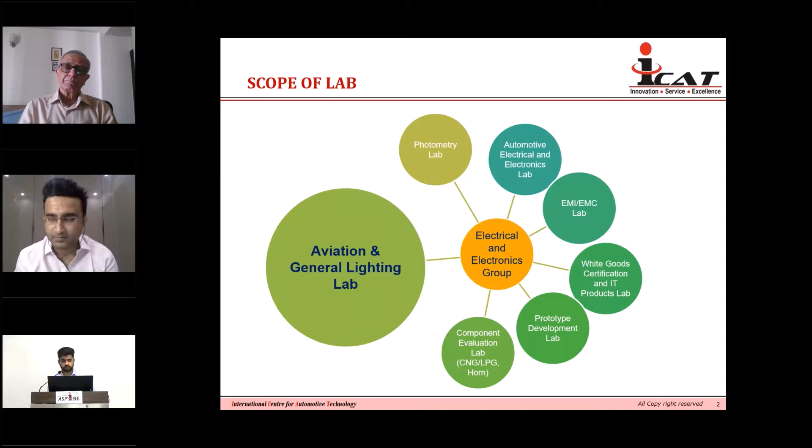In this lab, we have testing capabilities to do tests like dimensional tests for ICAO standard, FAA standard, and BIS standards. Also environmental tests such as high temperature tests, low temperature tests, thermal shock tests, salt fog test, corrosion test, EMI, EMC compliance or electromagnetic compatibility, rain test, moisture test, solar radiation test, dust test which comes under IP test, humidity test, and temperature cycling test.

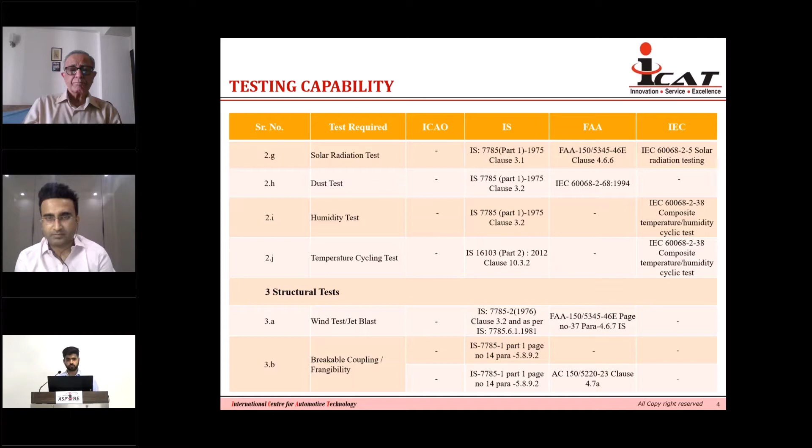Also for structural tests, we can do wind test, jet blast, and breakable coupling.

Under electrical test capabilities, we have insulation resistance test, high voltage test, light fixture power factors, surge protection, light fixture flickers, total harmonic distortion, and dielectric rigidity.

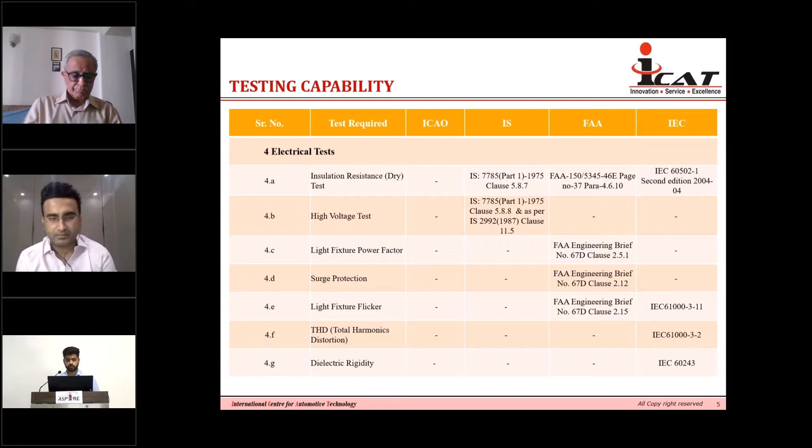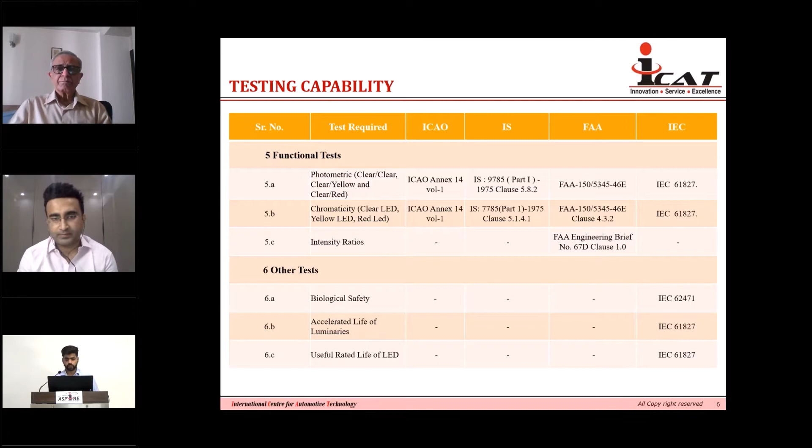Under functional test, we can do the photometric test, the chromaticity test, and the intensity ratios. Other tests can also be done like biological safety as per IEC 62471, accelerated life of luminaries as per IEC 61827, and useful rated life of LEDs as per IEC 61827.

These are the testing facilities which we have in ICAT, like 2-meter integrating sphere for luminaries, 20-inch integrating sphere for LED modules, profile projectors, Type A goniometer, Type C goniometer. We have EMC chambers of 30-meter for vehicle tests, and EMC chambers of 3-meter for component tests.

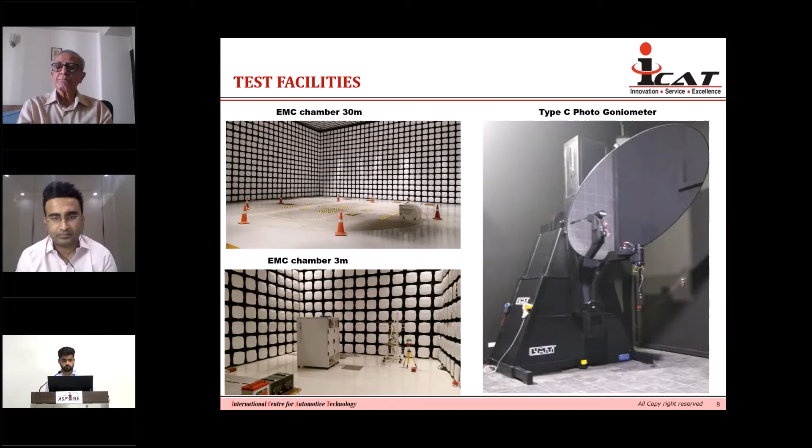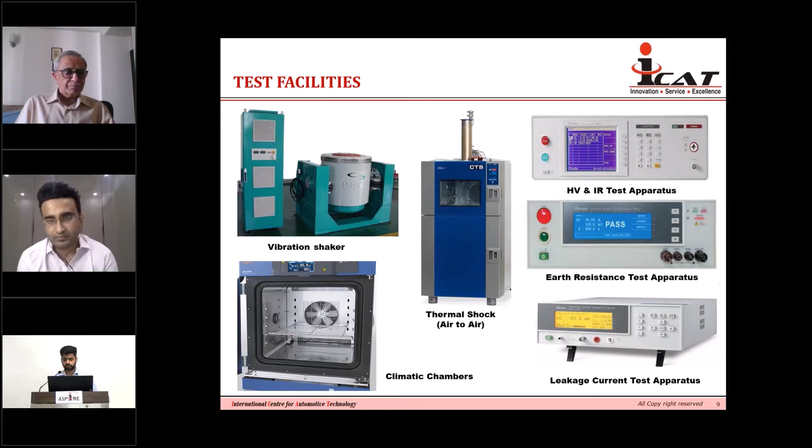We also have vibration shaker, thermal shock test setup, HV and IR test apparatus, earth resistance test apparatus, leakage current test apparatus, climatic chambers. We also have thermal test chambers, endurance chamber, and surge test apparatus.

Apart from this, we have ingress protection against water, ingress protection against dust, the IP test setups. We have a Weather-o-meter, a salt spray chamber as well, and HFT test apparatus for plastic parts too.

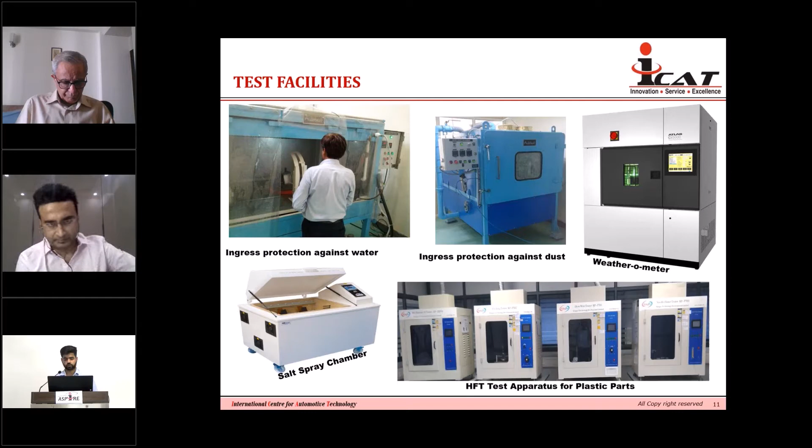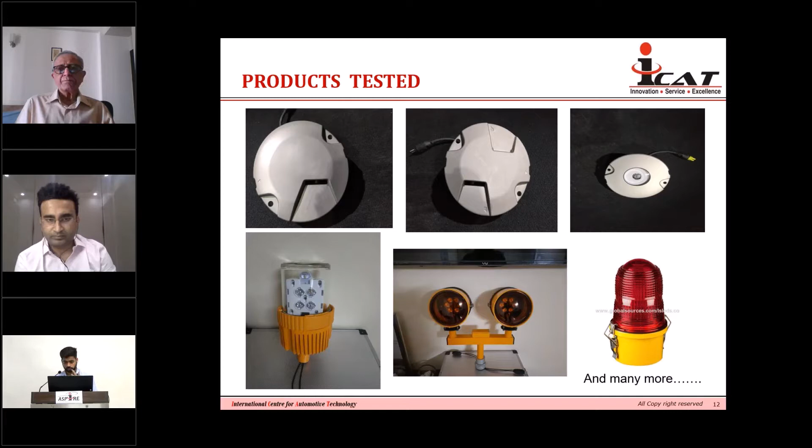These are some aviation products which we have tested at our capabilities or facilities. These are the runway lights which we have done, and we have done more than this also. Thank you.

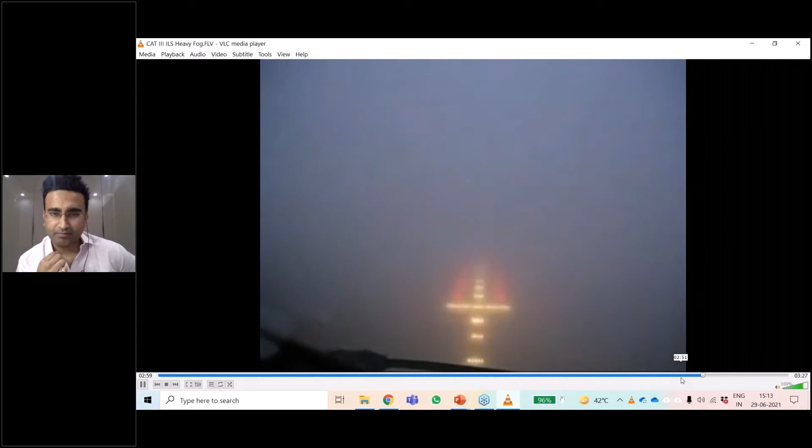So right now he's above the clouds and the fog. Now he has entered inside and he's trying to locate the runway. Then he sees SFL lights, sequence flashing lights. Then he sees the approach lights, then the threshold, the touchdown, the runway centerline, and the runway edge.

So you saw how the runway light fixtures made it possible for the pilot to land in such a low visibility period. So now airports have a duty to give pilots the best visual cues they can at the right moment when the pilot needs them. Because if you don't, they will not be able to land, and there will be runway closure or the flights have to be diverted, which is a very costly affair for the airline as well as the airport operator.

And ICAO study shows that the human eye can only detect a loss in intensity once it is decreased to 30% of its original value, which means every time the aircraft lands, there will be some damages on the light fixtures, on the prism, there will be scratches on the prism, there will be some rubber deposit on the inset lights, and which cannot be detected by human eye. And also, if there's an orientation issue, if the toe angle is not proper, the orientation of the lights is not proper, then also human eye is not able to detect.

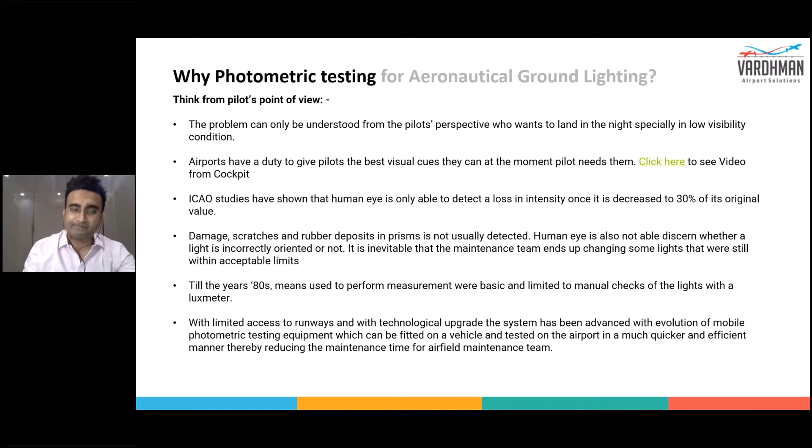So let's talk about this - I have explained everything, but even if sometimes we as humans feel that even if we know everything technically, why implement it? That's where ICAO and FAA play a very important role as regulators, and local DGCA authorities have implemented CAR, which is quite similar to ICAO, to make sure that airports are regulated, and they are ensuring this photometric testing is done as per ICAO.

So let's learn what ICAO says. ICAO in their clause 10.5.1 says that a light shall be deemed to be unserviceable when the main beam average intensity is less than 50% of the value specified in the appropriate figure in Appendix 2. Now, what is Appendix 2? Let's go to Appendix 2. I'm sure some of you must have seen it.

So this is Appendix 2, figure A2-8, which is for runway end light. The left figure that you see talks about the output candela, and the graph shows that every vertical and horizontal degree means 1 degree vertical and 1 degree horizontal, and this average intensity of 2500 candela is calculated based on the crossing points. You measure the output candela at these crossing points, and then you make an average output, and it should be 2500 candela. Not only that, at every point, the output candela should be not less than 1250.

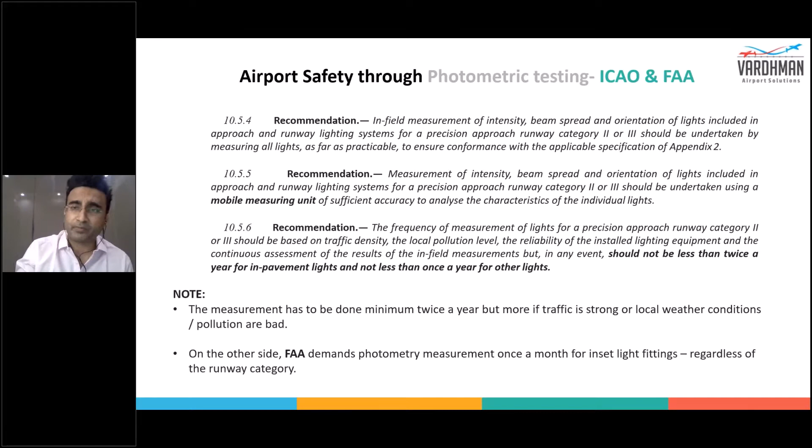And they do it on all airports irrespective of runway category, whether it's simple approach, cat 1, cat 2, or cat 3. They have also kept this threshold level at 70%.

So if the output candela in this graph - as per ICAO, average intensity should not be less than 1,250 - whereas in an FAA compliant airport it should not be less than 1,750, because FAA has defined the threshold level at 70%. So if it's falling below 70%, you need to replace the light.

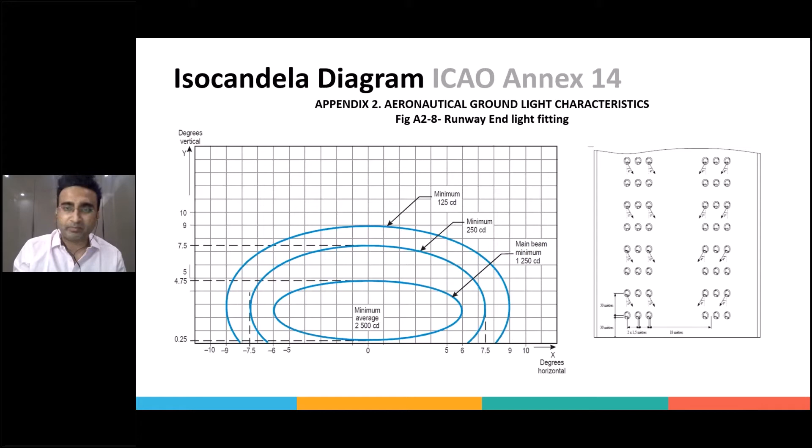So I hope that clears what the regulations talk about. Any questions so far?

Again, I see a blank chat window. So I think maybe a question and answer session at the end would be the way to interact with the audience. I'll continue with the next slide.

So, causes of degradation of the light fixture. Since I can't ask questions right now, I'll go straight to the next slide.

So first, light alignment, and we'll talk about the other parts also, but I'll go one by one so that it is easy for everyone to absorb the information.

Whenever inset lights are installed, this core cutting, the figure third on top shows the core cutting machine used to make the core. This is the core where the cutting is done to fix the shallow base in which the inset light is fixed. The green color item is actually the shallow base, not the inset light. After the shallow base is fixed, the inset light is fixed on top of it.

When you're installing the inset light itself, these jigs are used to align the light during installation, because there's a chemical which is put, and if these jigs are not used, they may not be aligned and oriented properly along with the runway, and you will see different angles of light coming out of the inset light. So it's important that at the time of installation itself, this has to be properly aligned.

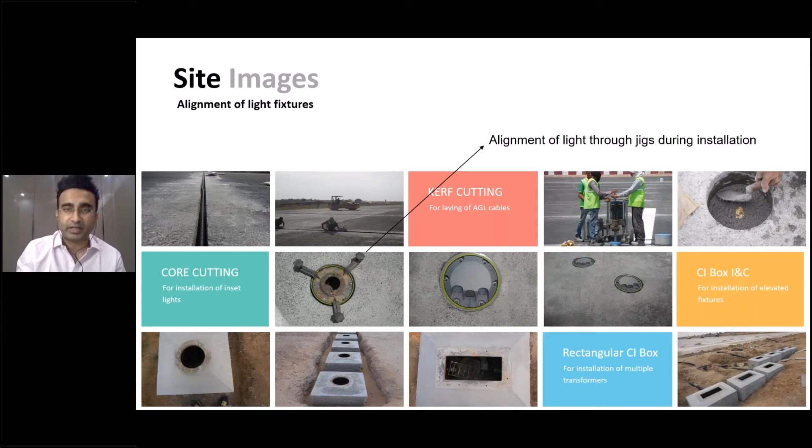Now some manufacturers have that toe angle fixed automatically in the light, whereas some manufacturers allow that to be changed by a tool. So it depends on which manufacturer you are taking the light from, but you have to make the alignment properly. Then the second reason for failure and degradation of light output is the cleaning of lights.

I have seen a lot of airports where there are a lot of contaminants which go inside and outside the fitting. Let me give you one example, since there are many and we cannot take all of them. This is a typical inset light installed on the runway, and because the aircraft is going on top of it, and every time the aircraft presses brakes, 1.5 pounds of rubber is removed from the tire every time it presses the brake, every time it lands.

So you can imagine the amount of rubber that gets deposited across the inset fittings, and they are actually silver, but now they have become black. Why? Because the rubber got deposited, and because these are halogen fixtures, they generate a lot of heat. When the heat is generated, the rubber gets deposited on the prism, which you can see in the second figure. It gets cooked, and you cannot remove it by a cloth or just water.

So it has to be done by a proper tool, a special tool used to clean the light. In the third figure, you can see we have actually cleaned that light, and now the prism is becoming transparent, and the light can come out. This has to be done on the field, because if you don't, the fitting will stay like this. So even if you have installed the light, there will be no light output, and the pilot will not be able to see this light.

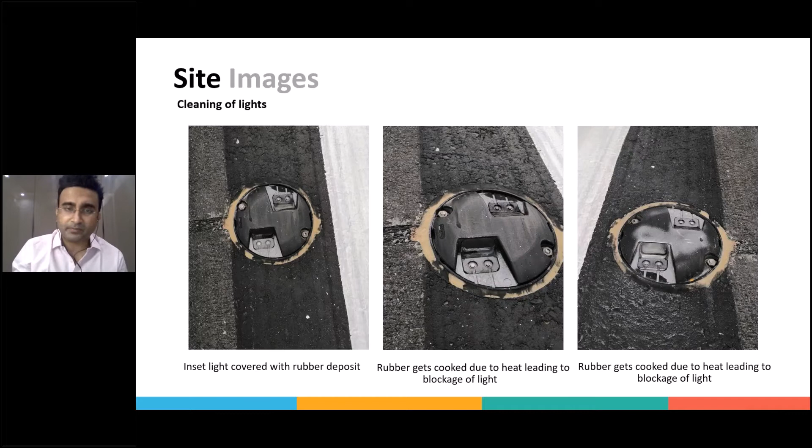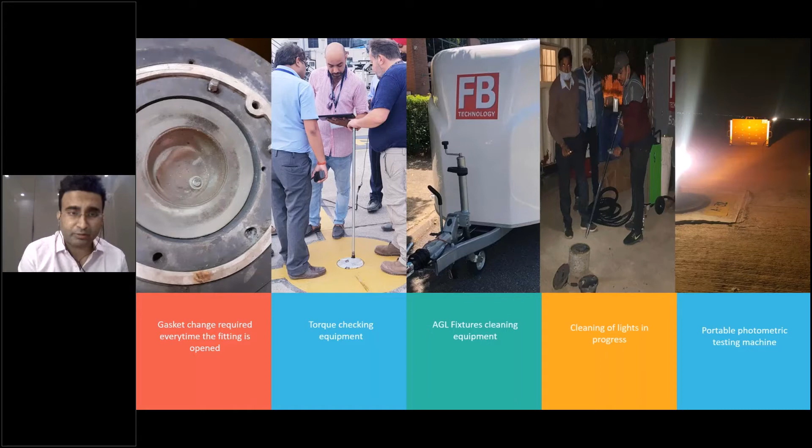Third reason is the torque of the light. This is very, very important from the safety point of view. In the second figure, you can see there's a torque equipment, a digital torque equipment. There are two bolts which are used to tighten the inset fixtures.

And if they're not tightened properly at the right torque level, then they become loose and are not oriented properly. On top of that, if it is loosened a lot, then because of the vibration of the aircraft, these fixtures might even come out along with the aircraft tire, which is a very, very big safety hazard.

So how will you know that they have been tightened properly? This digital torque wrench actually helps to not just tighten the bolts, but also record all the readings which you use to tighten these bolts, and everything comes into the tablet. So one person holds the tablet, and every time this equipment is used, these readings go into the tablet.

It will record how many fittings have been tightened, along with the location of the light fitting. The fourth figure shows the cleaning of the light. The third figure shows the cleaning equipment stored on the back of the vehicle. The fifth figure is a portable photometric machine, which you can use wherever in-field photometric testing cannot be done with the fixed vehicle-mounted one. And the first figure is very important, the gasket.

One important reason for degradation of light output is damage to the gasket, because if water ingress happens in the light fixture, the light output will not give the right output as per ICAO. Other reasons are failure or damage of the lamps, which you need to replace. Then there are prisms and filters which also get damaged.

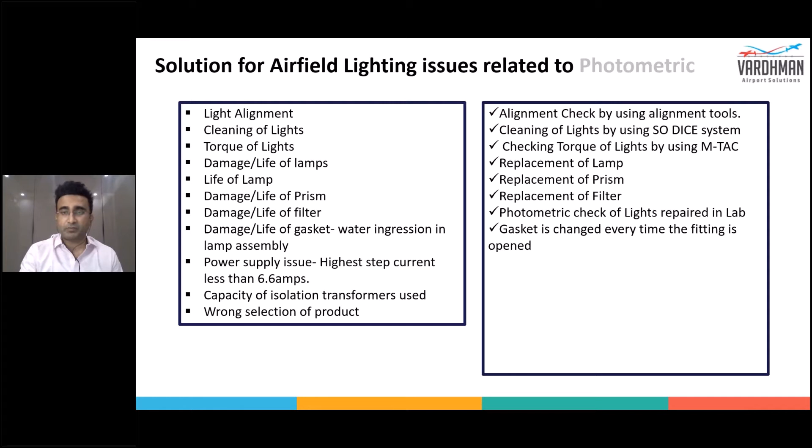Once you do the photometric testing, you can do it at the lab also, which you set up at the airport. And every time you open the fitting, the gasket should be changed so there's no water ingress every time it opens.

For the right power supply, to make sure it is 6.6 amperes, you need to calibrate the CCRs as per maintenance activities. The capacity of the isolation transformer ideally should match the rating of the light fixture, or be just slightly more—not much more. You can't use a 200-watt isolation transformer on a 100-watt light, because then there will be power losses in the isolation transformer.

And if there's a wrong selection of product, you need to change the product and replace it with the right product. Any questions so far?

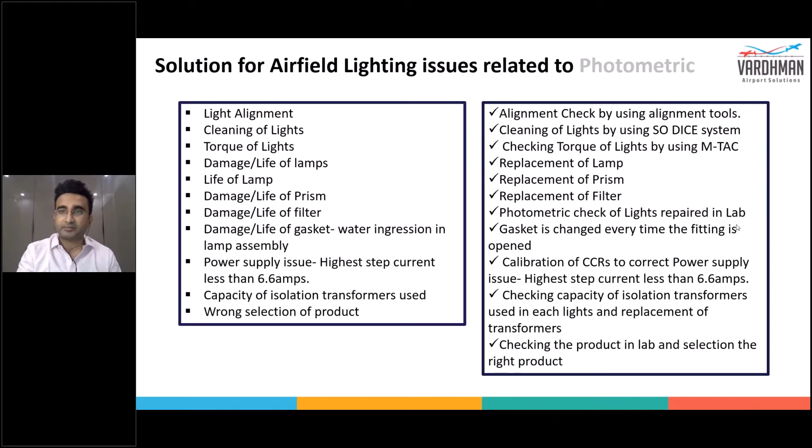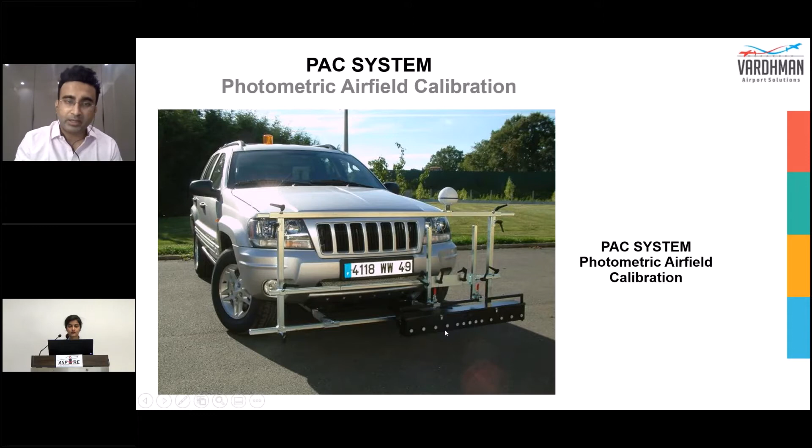And because it is unidirectional, it is fixed on front of the vehicle. If it is a bidirectional sensor, it is coming from outside the vehicle. So this is a system that we provide in Mumbai airport, where it is fixed outside the vehicle, because it is testing the photometric on both sides.

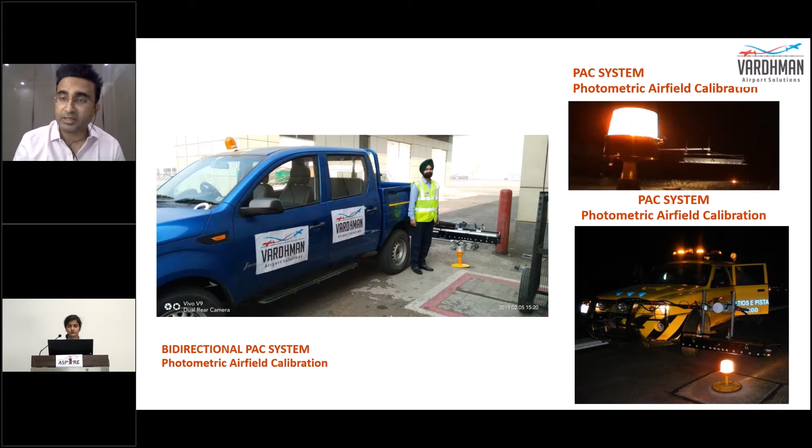So basically, the amount of time it will take for a bidirectional sensor, it will actually take half time, because in a unidirectional sensor, for a runway having centerline lights and edge lights, you will have to do the photometric testing 6 times, because every light has a bidirectional aspect. Whereas in bidirectional sensor, you just need to cover the runway in just 3 times - one is the edge, center, and then the second edge. So it will take exactly half the time. If the unidirectional sensor is taking 30 minutes, this equipment will take 15 minutes. So again, there's a saving in the maintenance time for photometric testing.

Again, this is cleaning equipment, torque equipment, and the photometric testing that we did in Jaipur airport. There are some site images.

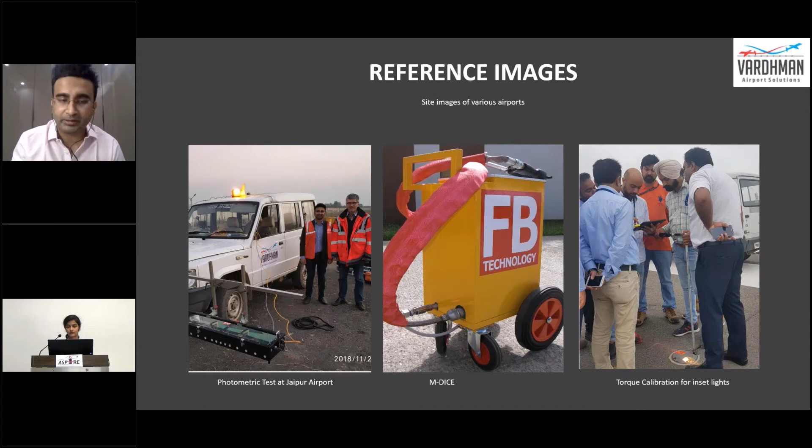So once you're doing this photometric testing, the SOP has to be actually fixed by the airport - how exactly, what is the process and SOP you need to follow to do this photometric testing. Because it is not about just doing the photometric testing. It is about making sure that all the light fixtures are repaired properly on time, and then they are replaced with faulty fixtures, and the faulty fixtures are again replaced with new ones, or get repaired, whatever issues they have.

So first, before doing the photometric testing, you need to clean all the lights, because there have been studies which show that before you clean the light and do photometric testing, there is a possibility more fittings will fail. So first, it is important to clean the light fixtures first, and then do the tightening of the bolts using the torque equipment. Then check the alignment using the alignment tools provided by the manufacturer to check whether the toe angles are right or not, and then do the photometric testing.

So after you do the photometric testing, whatever lights are failing in the photometric test, you replace it immediately with the right ones on the field, and you bring all the faulty fixtures back to a photometric lab inside the airport, and make sure that all the rectifications are done. And using lab equipment, you again check the photometric of those lights, and then keep them back at the right place, so that they can be used again whenever some other light fixture is failing. So this is basically the SOP for the light fixture.

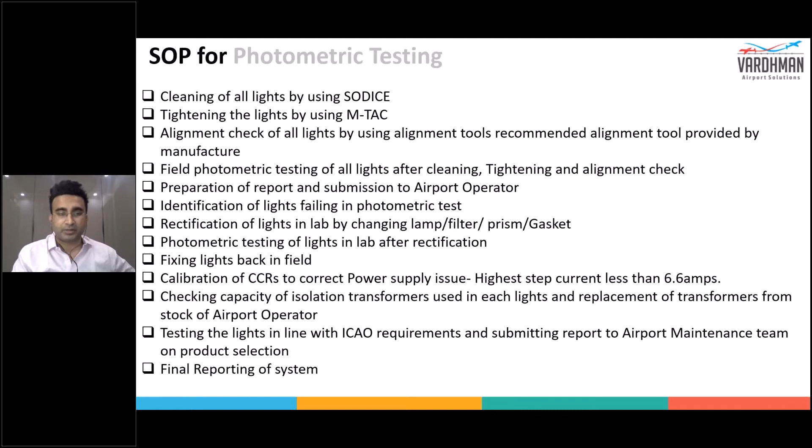And at the same time, you also have to make sure that CCRs are calibrated to the right current output from 2.8 to 6.6 ampere, and the isolation transformers are also of the right capacity. And once you do all these activities, you make sure that whatever report you're generating is submitted to the maintenance team, and then eventually to the airport operator as well as DGCA.

So now the most important thing is a lot of people feel that this is a burden and this is increasing the cost of running an airport, which is actually not true. Unlike a security system, like after 9/11, you must have seen that all airports and five-star hotels started rigorous checkings and frisking at the entry points, which actually not only adds to the cost of maintenance and operations, but also increases the hindrance for the passengers. But in this case, it is not like that.

So whatever investment is done by the airport to make sure that this photometric testing is done, it actually reduces the maintenance cost, because the technician needs to go to the runway not to visually check whether the lights are working or not.

He will check the report to see which light needs to be replaced, go there, and replace that light, fixing the problem. Eventually the failure will not happen, and this also reduces the number of times maintenance is needed.

All airports have a fixed time for runway maintenance, maybe once a week, once a month, or once a day. If they have a fixed window of 2 hours, they can reduce it to 1 hour because they can use the photometric testing report to check the photometric output and reduce that time. The time saved can be given to any airline to land and take off, meaning more revenue for the airport, and it also saves a lot of energy.

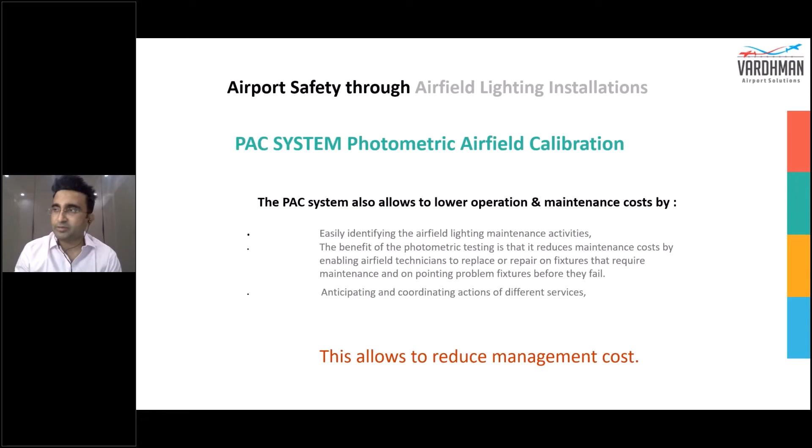So the question may arise: how does photometric testing save energy in an airport? Because the light will give the same light output — a 200 watt will give 200 watt and consume 200 watt. So how does photometric testing help reduce energy consumption? Here is the answer to that question.

There's a study showing that if the lamp is running at 6.6 ampere, and you reduce this to 6 ampere, the lamp life increases by 500%. Typically a lamp lasts 1500 hours. So if you don't run the lights at 6.6 ampere, you can increase the lamp's life, meaning you don't need to replace the lamp as frequently.

Why do airports actually run lights at 6.6 ampere? Because if the output isn't right and a pilot gives feedback saying they can't see the lights, the only option for the airport operator in the ATC tower is to switch the lights to 6.6 ampere, the maximum current output. They assume that at 6.6 ampere it will give the maximum light output, so there won't be complaints about low or poor visibility. But if you clean the lights properly and do photometric testing, you can run between 2.8 and 6.6 ampere, increasing lamp life and eventually saving maintenance cost.

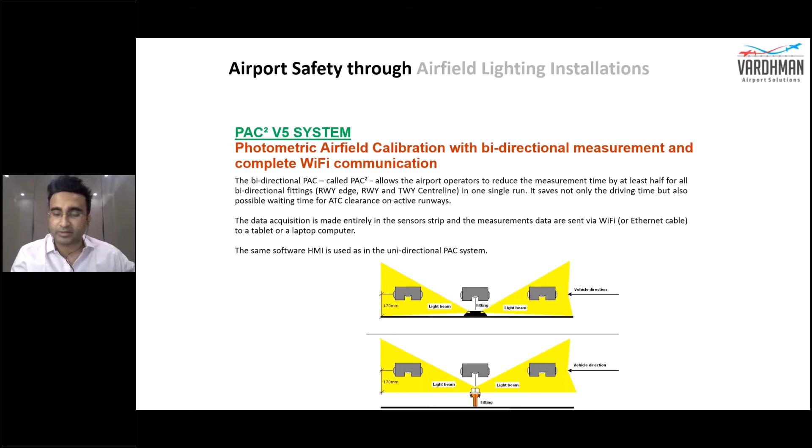I've explained how a bidirectional sensor actually senses the light and why it's beneficial. This is just a picture showing how it's done on an elevated fixture as well as an inset fixture. Both sensors take input from the light and record all the data in software to generate a report. This is how the diagram works.

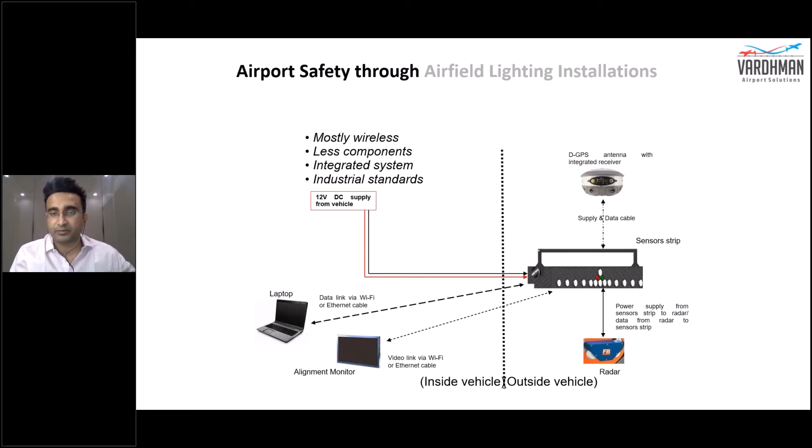This can only be done at night, because in daytime there is daylight itself. So the output of the light fixture has to be measured at night only.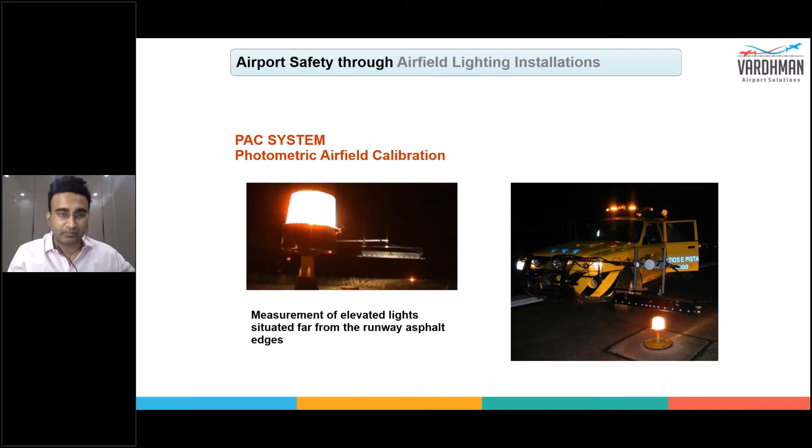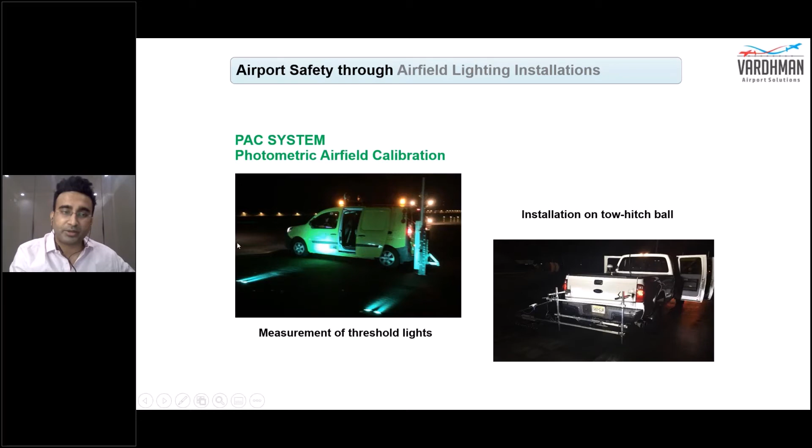Some customers asked: this sensor moves on top of the runway end lights, edge lights, and center line, but what about the threshold lights and end lights? It would be very difficult because they are horizontal, on the width of the runway and not on the edge. So this sensor can be moved upside down, and you can move the vehicle from one side of the runway to the other and do all the lights together. This is just an image to show that.

These are the light outputs in candela, as per ICAO and as per the runway category. What are the 50% values? You can fix these values at 50% as per ICAO, but different airport operators can fix this at 60%, 70%, or 80% also, since FAA talks about 70%. So the airport operator is not necessarily required to follow ICAO only. They can put the threshold value at 60% also, and then the lights will show that they are failing.

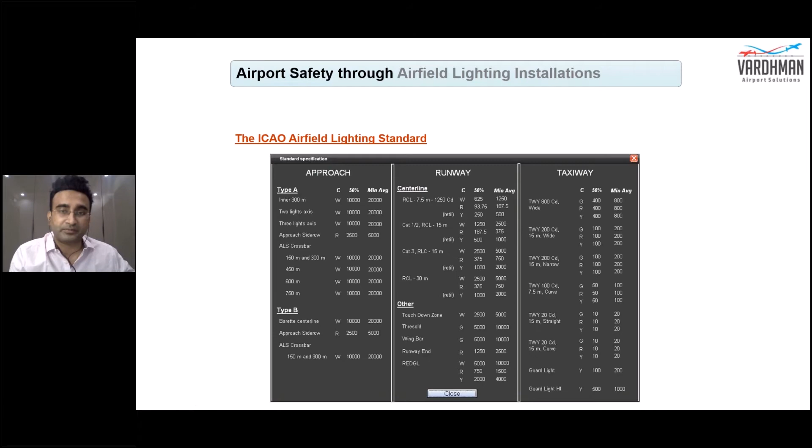So how this equipment is used: basically the sensor is fixed on the vehicle. You select which lights to be measured, then you select the distance between the light fittings, then you drive over all the lights, and the software displays in real-time basis what are the results of each light. Once you complete the lights, you name the function, noting whether you have covered the runway edge light, runway center line, or taxiway center line.

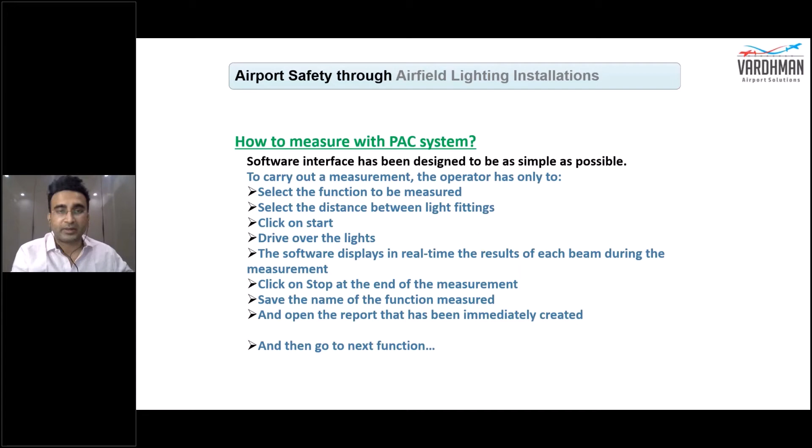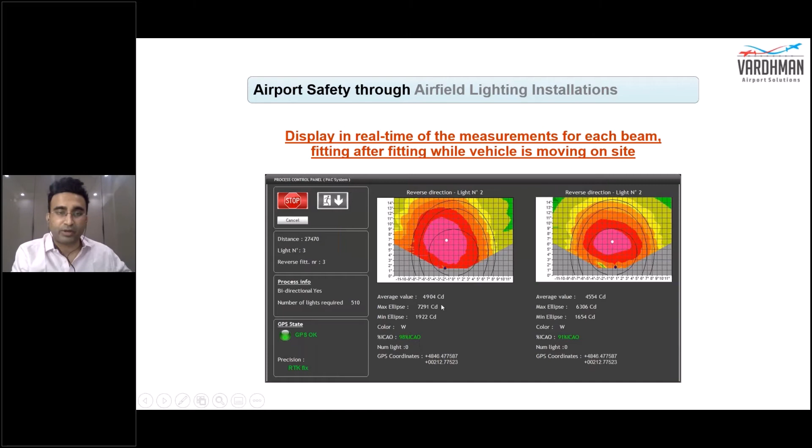This is how the report is generated individually for each light. The average output of this particular light is showing 4,900. It's a center line light, average value 4,900, maximum is 7,000, minimum is 1,900. It is 98% of ICAO. These are the GPS coordinates of the light fitting, which means the light is passed, which is why it is showing green in color. If it is falling below 50%, it will show red in color.

When all lights are tested together, you can fix that threshold level. Here the ones below the threshold level of 50% are shown in red, and the ones shown in yellow are the ones passing the photometric testing characteristics as per ICAO. These are all the lights. You can individually select which light you need to see, and it will show the values.

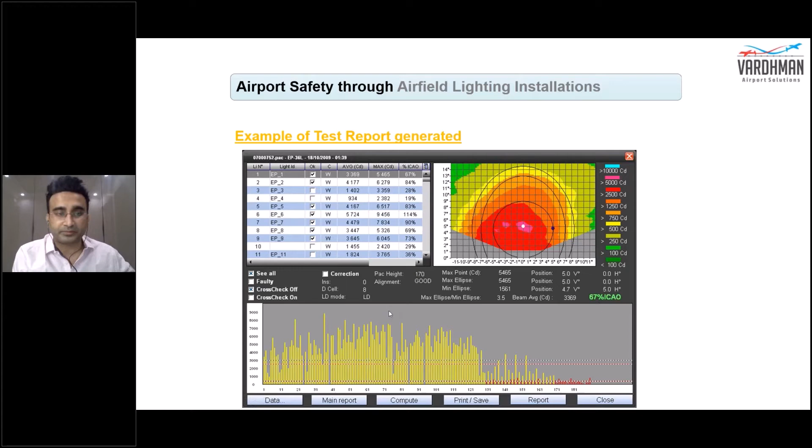This image shows a very high definition, high resolution candela output which is taken. On each light, when the sensor is rolling on the lights, every millisecond this output candela is taken, and around 11,600 samples are taken for each light. So it's a very high resolution image. Similarly, this photometric output is 11,000 samples, which means it is a very high resolution testing done for the light fixtures, so it cannot be incorrect.

You can compare with the ICAO standard also, and you can check the orientation of the light, whether it is on the right hand side or the left hand side, by visualizing this figure. You can also see if it is not oriented properly, and you can check if the lamp is aging - the red color is not shown, which means the lamp is aging, so you need to replace it before it actually fails. The sagging of the filament is also an issue which can be detected in the software report.

I have already told the importance of cleaning the lights before photometric testing happens. This is a typical example at a Hong Kong airport where the lights were tested before they were cleaned, and then after cleaning, the photometric testing was done again. Many of the lights which were actually failing before had actually passed the test. So it's quite evident that you have to clean the lights before doing the photometric testing.

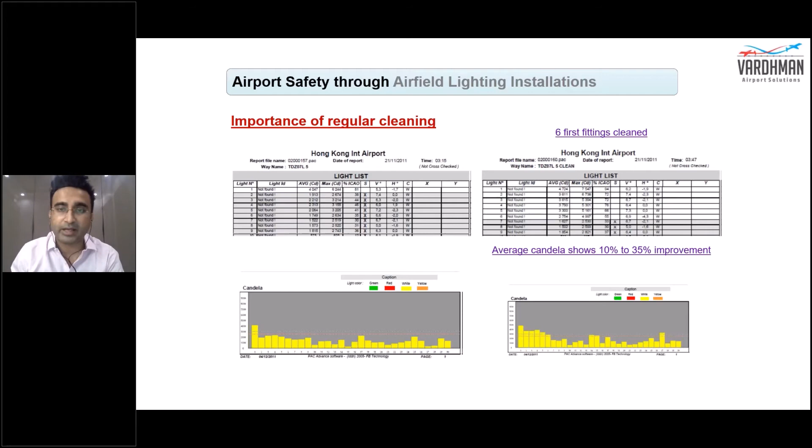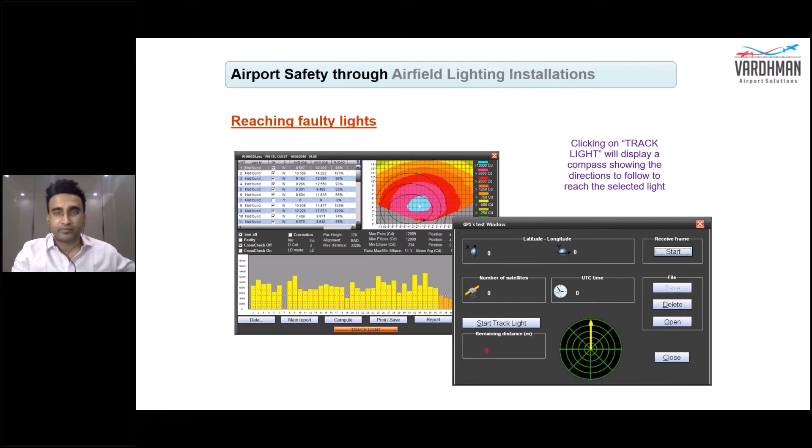So this is the second stage of photometric testing, which means after you have tested in the field, removed the faulty lights, and brought them back to the lab. You can't correct the lights, put them back on the field, and do photometric testing again, because it will take a lot of time.

So for that, you need workshop equipment also in a dark lab, where you fix this equipment, bring the faulty lights, replace the gasket, prism, or whatever lamp is required, and test the photometric performance in the workshop equipment. Once they pass, you can put them back in the field whenever required.

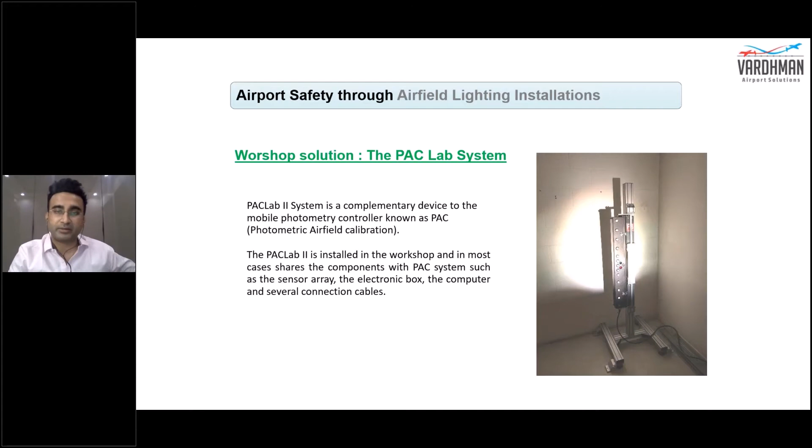And the benefit of this photo workshop equipment is that the light automatically rotates - whenever it tests one side, the other direction also gets tested automatically.

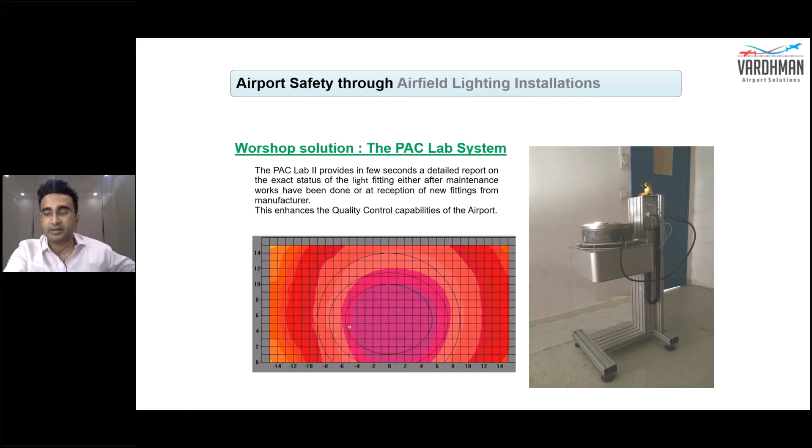And for workshop equipment, there's also a micro CCR, because normal CCRs give 5,000 volts of output, which is quite hazardous for a human being. So it is better to have a micro CCR to test the lights in the photometric workshop.

Then there are cleaning equipments. One is SoDICE - basically baking soda used along with compressed air at 7 bar pressure, and when it is pointed towards the light, it gets cleaned without damaging the light. So this is the basic functionality of the cleaning system.

For airports which are in cold countries, you can use dry ice instead of baking soda.

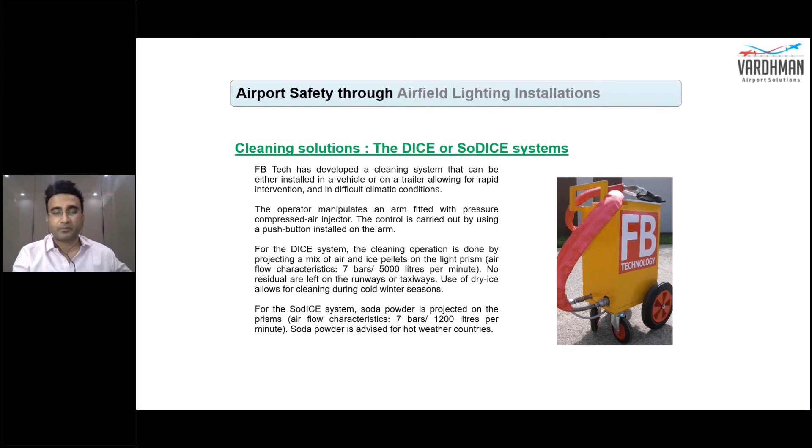Then there's a system for PAPI. A lot of times, I'm sure some of you might have heard about PAPI lights getting tested through a test pilot and a test flight, which is obviously a costly affair, because you have to check the PAPI by asking feedback from the pilot. So why depend on the pilot or the aircraft? You can have a system which can measure the angle on behalf of the pilot and give the output of whether it is aligned properly or not.

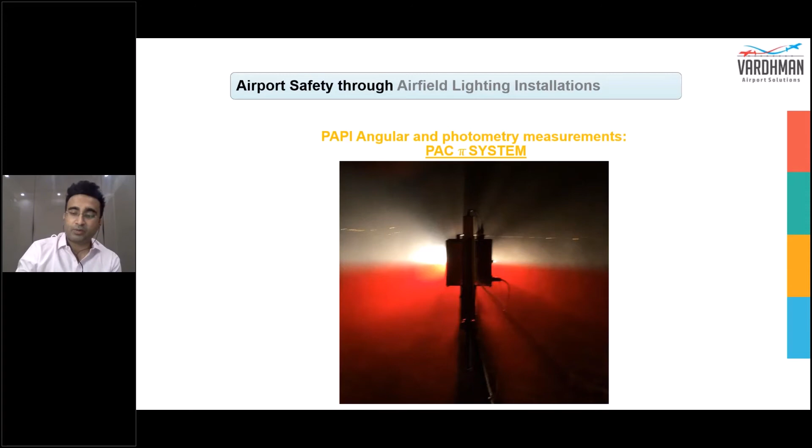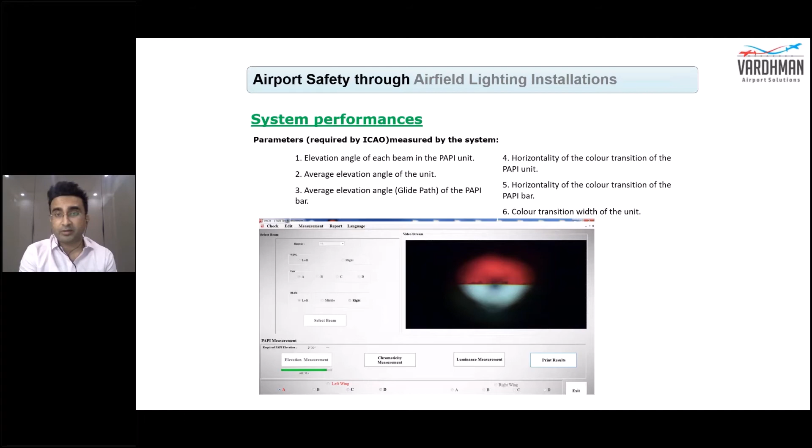So this PAPI system is a camera-based system which tests not only the photometric testing, but also checks the elevation angle of the PAPI unit, average elevation angle of the unit, as well as the PAPI bar. It also checks the horizontality of the color transition of the PAPI bar, and it checks the azimuth aperture and photometric diagram of the PAPI unit.

And the most important is color chromaticity, because there's a red color as well as a white color. It checks whether the red and white colors are as per ICAO Annexure 14 or not, the chromaticity output. I'm sure, like the diagram I had shown in Appendix 2 earlier, that was for intensity, but there's another diagram in ICAO which talks about color chromaticity.

So it's not that white can be any white color or red can be any color. There's an area defined in this color chromaticity chart in ICAO, and these lights have to be tested to see whether the filters are functioning properly, because if the filter is not right, it will again give the wrong light output to the pilot. So this checks everything in a PAPI unit - there's no need of a test pilot or check pilot to check the PAPI.

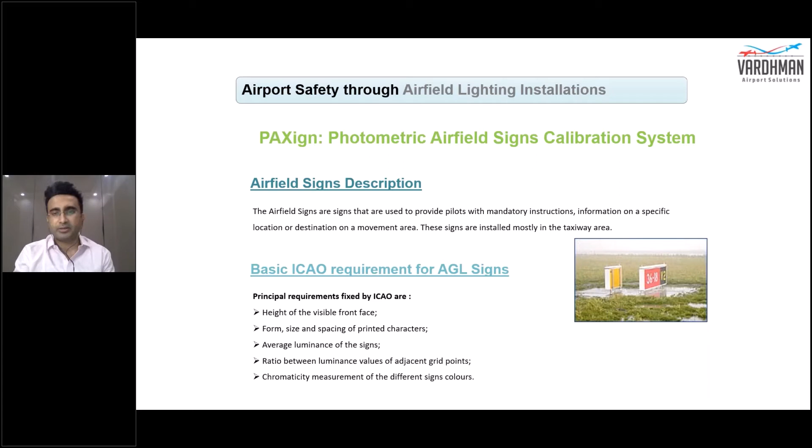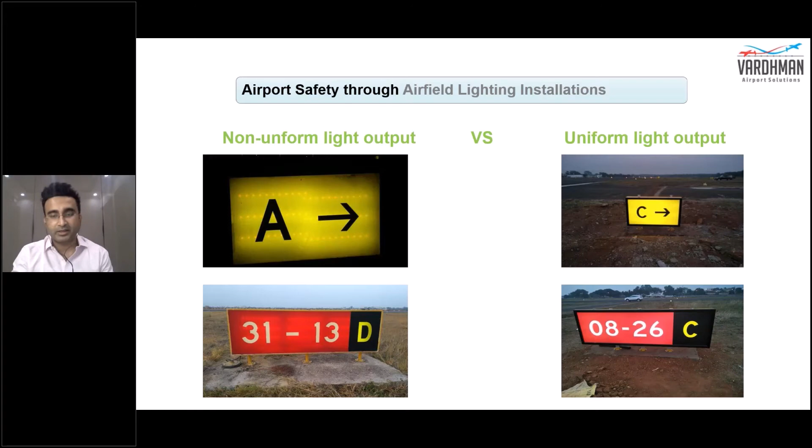Then this is an important equipment for airfield signages, which checks the output candela of the signboards. I have captured some images in some airports where you can actually count the number of LEDs, but as per ICAO, it should be uniform light output. You can see the left-hand figure and right-hand figure and what the difference is - basically, this equipment checks whether it is giving uniform light output or not.

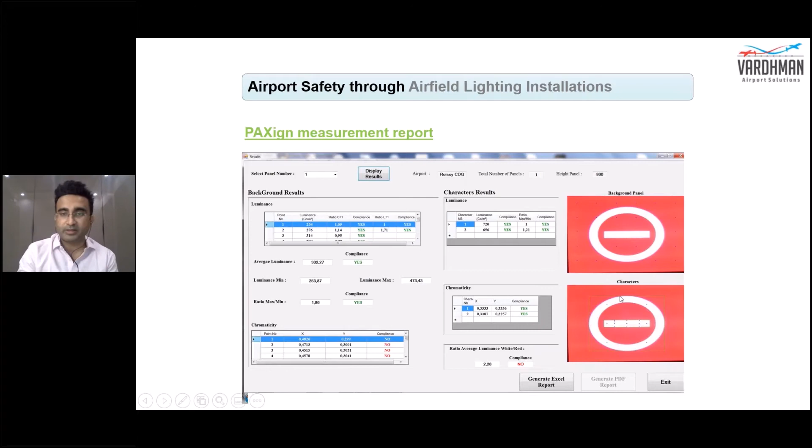Then there's a PAC Apron where you can check the apron floodlights also, whether it is giving the right amount of lux at the apron area or not, and it will make a diagram to make sure that there are no black spots in the apron area, which is very dangerous for an apron area.

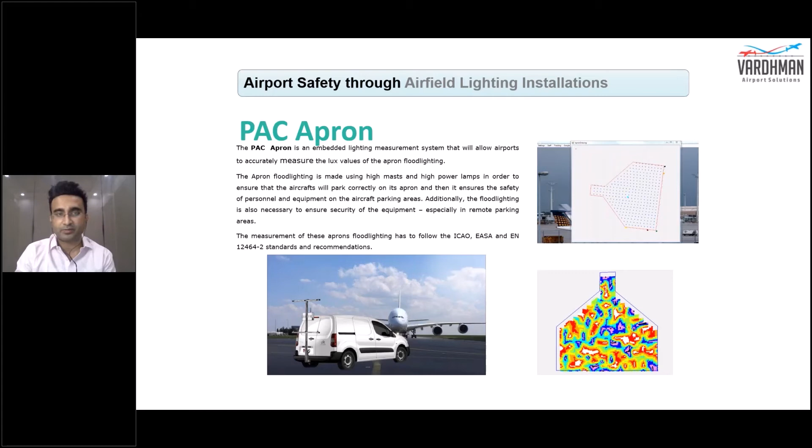Then there's the torque equipment, which I've already explained what exactly it does. The reason it is used is because somebody in the field can say they have actually checked the torques, but how will you know they have actually checked it or not? The maintenance manager cannot be on the airfield all the time. So by checking the DGPS coordinates as well as the torque figures of so many lights, the maintenance manager will know that it has actually been checked.

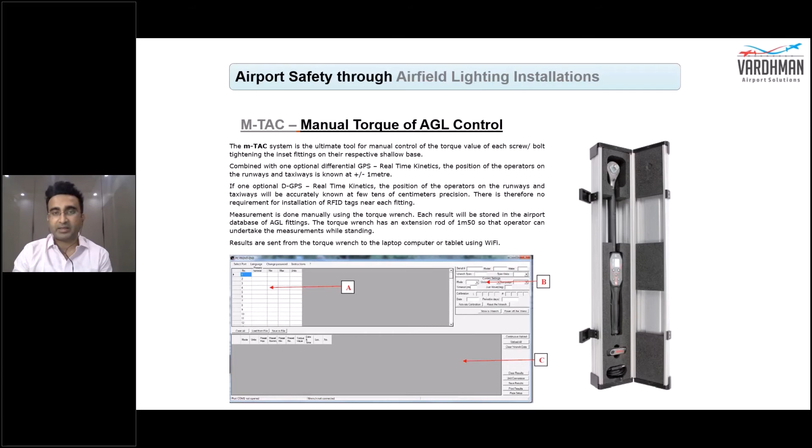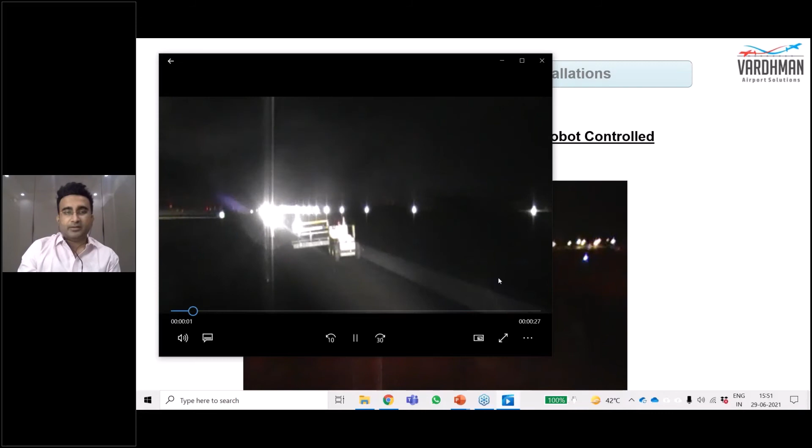Then there's a MARC One equipment. Since we are running out of time, I'd like to show how exactly it is done using an unmanned vehicle. This equipment is basically an unmanned vehicle, controlled by a tablet, and it is testing all the lights.

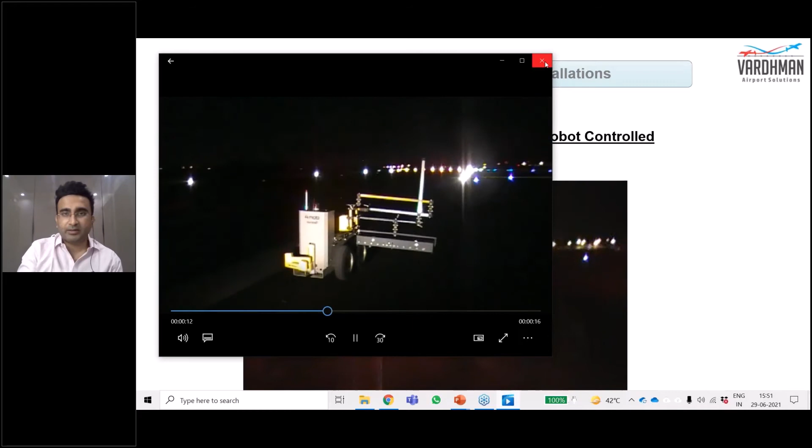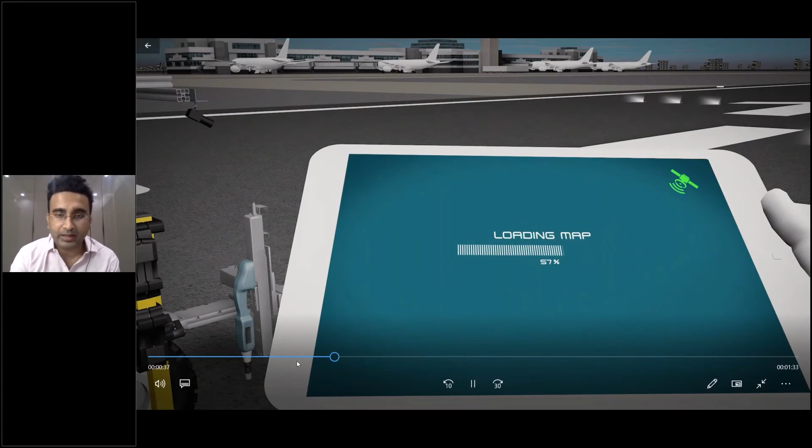I'll show another video which actually shows how exactly it is done. This equipment, MARC One, has torque checking, photometric testing, cleaning, everything in one equipment. And that is a robot-based equipment, controlled with a tablet.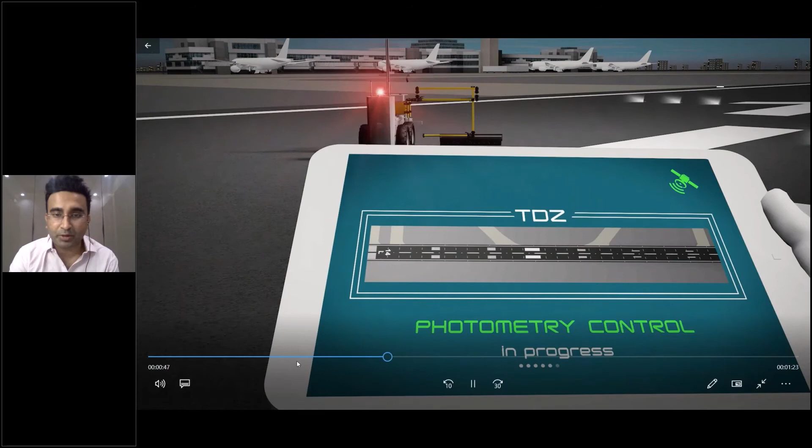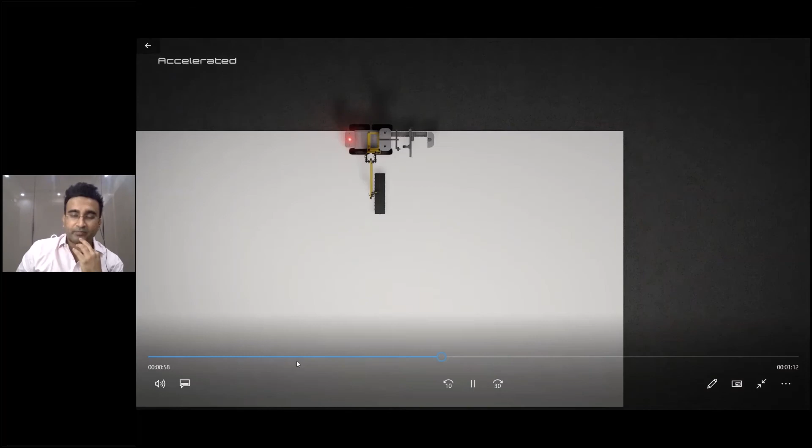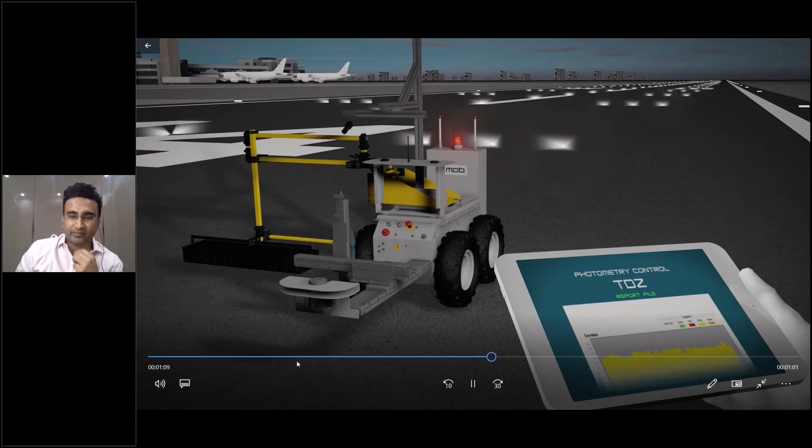I think I will let the video do the talking. I know the audio is not audible, it's just for visualization of how exactly the photometric testing is done using this vehicle. This tablet will get the immediate results, which light is failing, which is passing, and the report will be generated in real time.

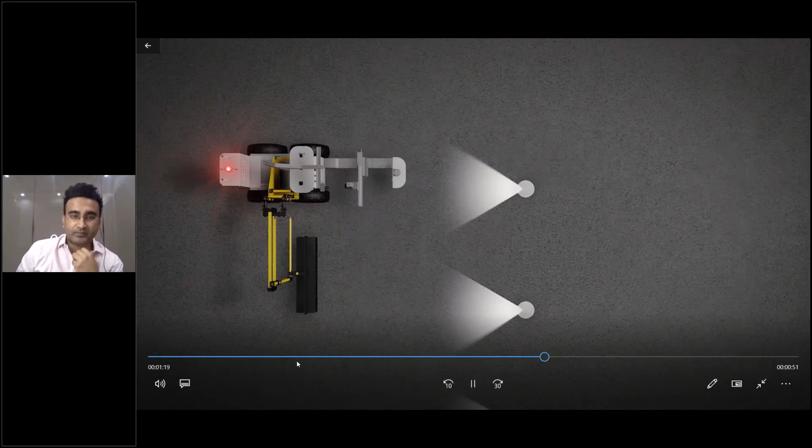So there's a sensor which checks where exactly the nuts and bolts are, and it will tighten automatically for all inset lights, and it will capture the results also.

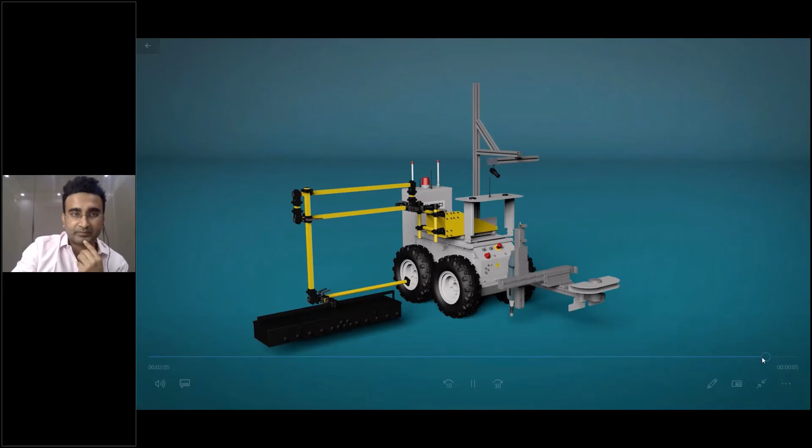Then there's one more equipment which I don't have an image for, but for approach lights, you can see one engineer, one of our technicians, holding a sensor, basically multiple sensors fixed on this equipment. And there's another engineer taking a tablet, capturing the light output in front of the approach light, and the result is captured on the tablet. It's a very tedious task, because somebody has to use stairs, go on top, fix that in front of the light, and then take the output, which is very time consuming.

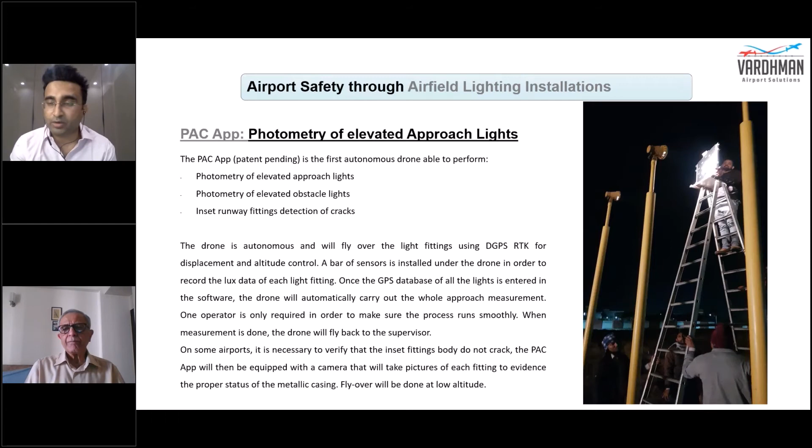Though ICAO says whichever light is possible, you should test it. But there's a latest technology using drones, where you can test the photometric output of approach lights. That's the latest technology in photometric testing, that drones are used to test the lights. They have been doing this testing in Europe at some airports, and very soon you'll see the technology across the globe.

So that's it, I think that ends my presentation. My coordinates are available, you can send us an email for any clarification you have, but I would like to take questions if somebody has any, and the panelists and organizers can let me know if there's a question. I'll try my best to answer.

So we have a few questions from our audience. The first question from Mr. Vishant Chaudhary: what are IC dots, please explain in brief? I'm not sure what they mean by IC dots.

Next question from Mr. Sudhir Raheja: what should be the speed of the car while doing photometric testing? Basically it's not on a highway, it's done at the airport. If the photometric testing is done on the runway, since the runway is straight, it can be done at 60 km/h. On the edge lights, you have to be very careful whether you're driving on top of the light or not, because they are elevated fixtures. Ideally you can do it at 60 km/h, but it takes time to learn how to drive on top of the lights — for inset lights you can do it quickly, but for elevated lights you go at 40 or 50 km/h. For taxiway lights, because they have curves and you have to make sure the sensor stays on top of the curves, you have to slow down, so it takes more time on taxiways because of the curves.

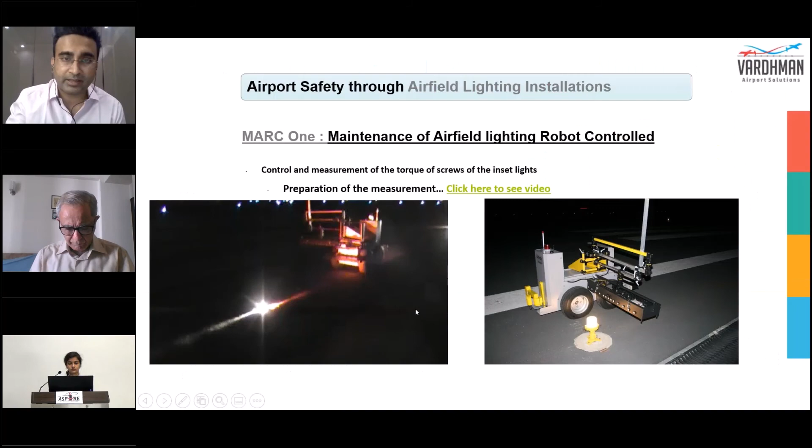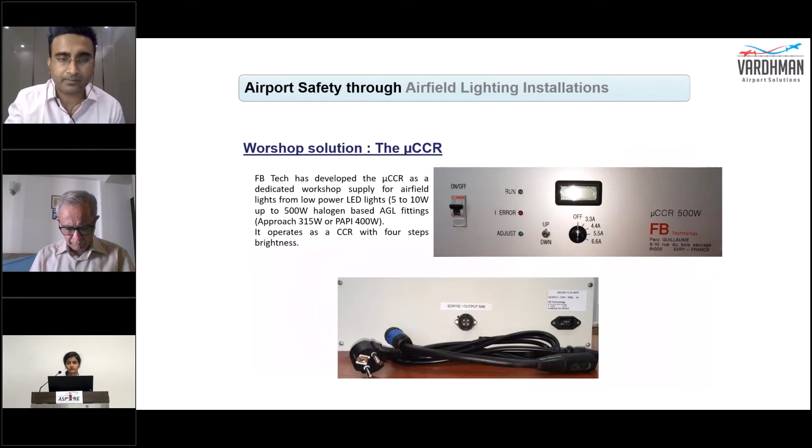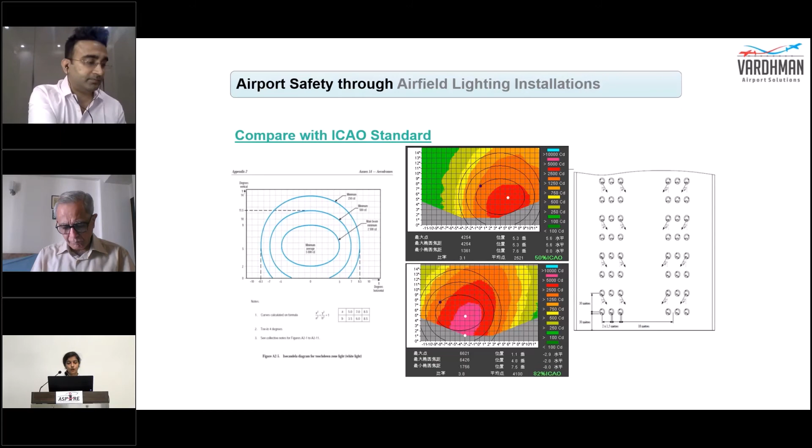Next question from Mr. Dhusar Kumar Mondal: In the chromaticity diagram, what do the X and Y coordinates signify?

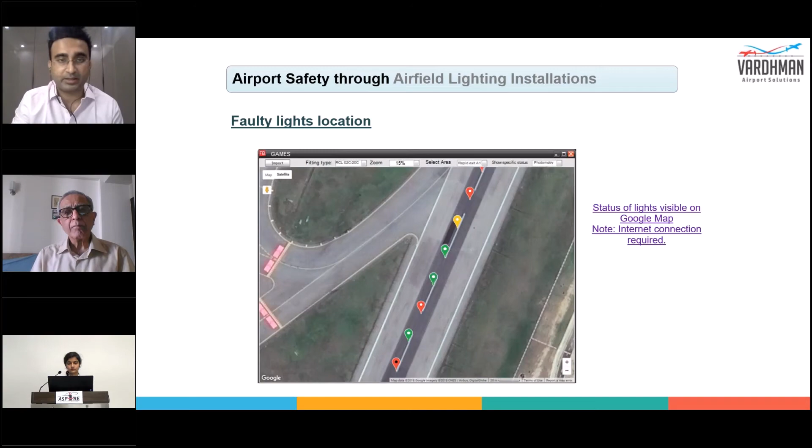So basically, X and Y coordinates map exactly which point is coming on the color chromaticity chart, and whether it is compliant to ICAO or not, because ICAO is quite strict about these areas. They have even defined a different color chromaticity chart for halogen and a different one for LED, so your X and Y coordinate should fall under that specific area. This chromaticity testing can be done using equipment if it has a chromaticity sensor to give this output.

Next question from Mr. Amit Goyal: For cleaning purposes, you suggested baking soda, but caustic soda has much better cleaning properties. Then why is it not used?

Basically, there are two types of materials used. One is baking soda, and there's another raw material - I don't remember exactly what it is - but baking soda is actually used because it is widely available. Even I've seen this OEM technology in Paris, a French-based company doing photometric testing, and they're using Tata baking soda, manufactured in India, because it is widely available. So since it is already made by Tata, it is widely available in India, so they have used that. But in any case, I can check with the manufacturer if anything else can also be used, like he has pointed out. But it's the OEM who has decided which raw material has to be used, not me. It is recommended by the OEM.

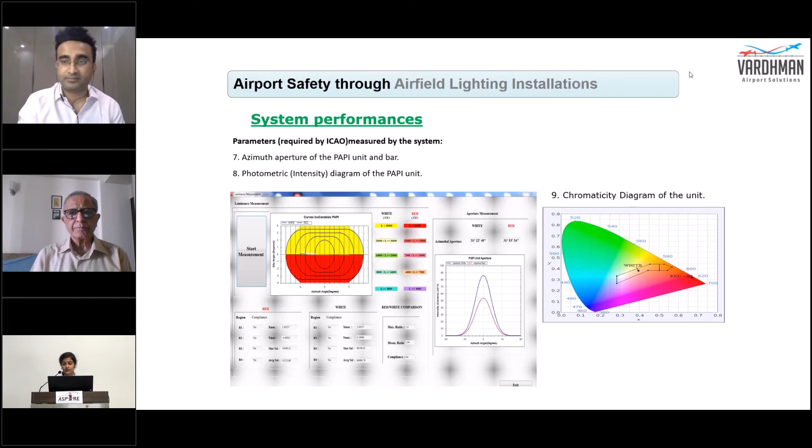Thank you, sir, for this knowledgeable presentation. It will help us all greatly. We would like to also let you know that ICAT is currently serving the airfield lighting industry by carrying out photometry, mechanical, and electrical testing as per ICAO Annexure 14 and FAA regulations. ICAT has wide experience testing over 500 airfield samples, providing strength and safety to the Indian aviation industry and Indian skies.